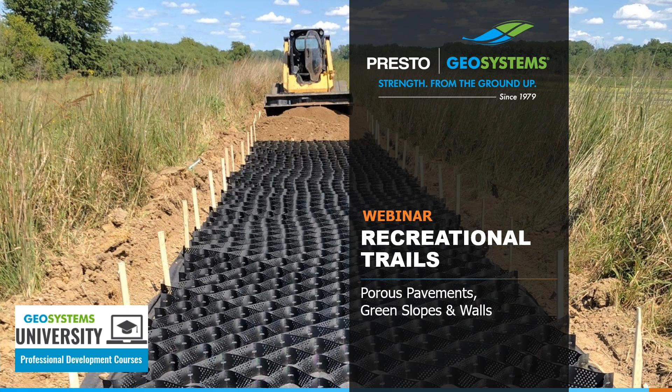The focus of this presentation is on ways to build recreational trails for walking, horse riding, and light vehicle use, as well as different methods for stabilizing embankments near trails.

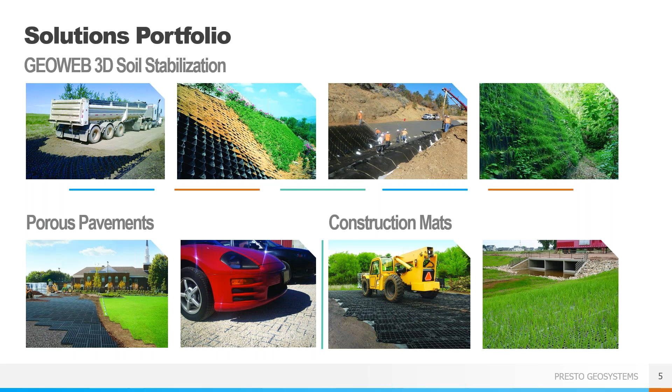We also have a line of porous pavements, both vegetated and aggregate infill versions, and some lightweight reusable construction mats. Today we will cover some GeoWeb solutions as well as our aggregate porous pavement product and a few of our construction mats.

An important thing to keep in mind as we go through this webinar: the trails made with our products are all considered permeable trails. That is, there's no impermeable paved surface being placed. The final surface is going to be stone or sand material.

This lessens the environmental impact of the trail, reduces the amount of heavy equipment required for installation, often in difficult to reach locations, and improves the overall cost and speed of the project.

We'll begin with what makes a good trail. The first aspect of the design is the reinforcement of the trail area, especially when the trail moves through sensitive areas. Keeping the path intact is how you keep people away from damaging vegetation or getting lost while wandering.

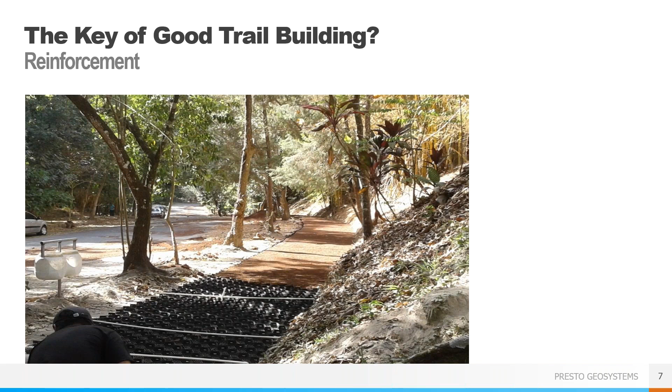The trail needs to be clearly delineated and needs to be reinforced enough to stay in place over time. Using products specifically designed to act as the reinforcement of the soil or stone means the trail will last longer and will not encroach on the surrounding environment.

The next key to a well-designed trail is drainage. Ponding water can ruin a trail surface, and water that runs off the trail into unreinforced areas can scour and damage those areas. As I mentioned, all the products from Presto are considered permeable, and it is precisely for this reason.

By keeping the surface permeable, the water infiltrates at the point of contact right where it hits the trail. The water can then permeate down through the product and into the subgrade, entering the groundwater system. The water won't pond at the surface and it won't run off or collect outside the reinforced areas.

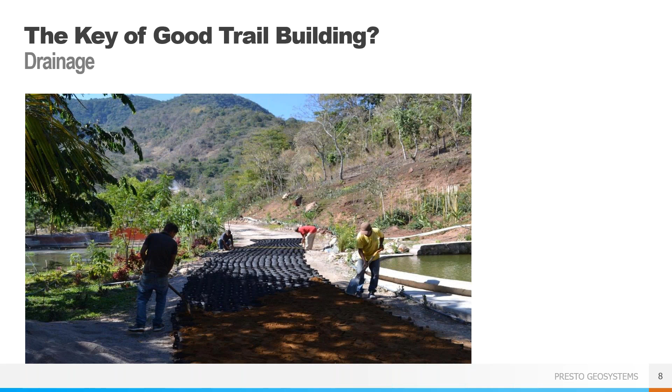This keeps the trail in the same condition no matter the weather, so there won't be any flaws or failures created below the surface that you can't see.

The last thing to consider when designing a trail is how to confine the surface. Loose aggregate, stone, or sand is easily moved under shoes, hooves, tires, and water, leading to ruts, holes, and generally damaged trail areas. When the trail surface is damaged, people want to move around the damage, leading them off the trail into unprotected areas, potentially disturbing sensitive environments.

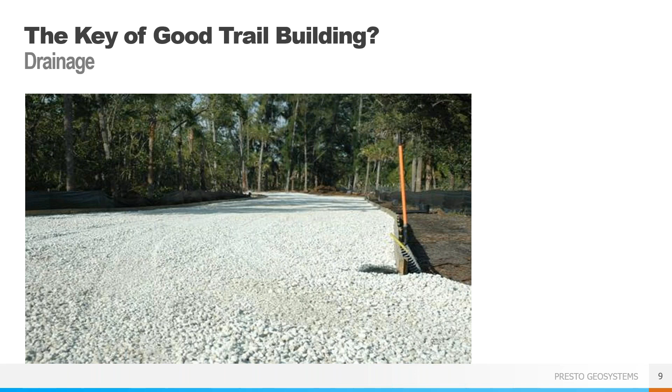Keeping the surface in place is an important feature of the products from Presto. When the stone or sand is properly held in place, ruts cannot form and the material can't be washed away. This greatly reduces the amount of maintenance required because the trail's surfaces aren't degrading.

Onto the products now. The first one we'll look at is the GeoWeb 3-dimensional soil confinement system. This is a GeoCell, which may be a term you've heard before. It's similar to a GeoGrid, but is 3-dimensional, so it has depth to provide true confinement and can be used in a wider variety of applications.

The GeoWeb system consists of two main components: cell size and cell depth. The cells come in three sizes, approximately 8 by 10 inch openings, 11 by 12 inch, and 18 by 20 inch. The heights are 3, 4, 6, 8, and 12 inches. The combination of cell size and depth depends on the project details and loading requirements, but generally trails will use a 4 or 6 inch depth and a small or medium-sized cell.

The seam strength is very important to the function of a GeoCell. The stronger the seam strength, the better designed the GeoCell is. A strong seam allows for heavier infill material, steeper and taller slopes, and better lifetime performance. The strength of the panel material, in our case high-density polyethylene, is also critical to the strength and performance of a GeoCell system.

Here you can see a typical GeoWeb panel. It comes tri-folded and palletized. Each section has a nominal width of 8.5 feet with lengths varying from 12 to 58 feet. The panels are flexible, opening like an accordion, so they can follow the natural contours of the work site without being confined to a rigid set of dimensions.

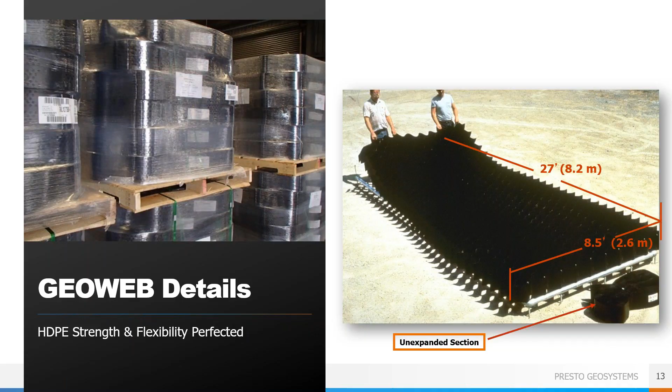Just a general note when reviewing product spec sheets for GeoCells and any geosynthetic product for that matter: pay close attention to any disclaimer language a product provider tries to sneak into the fine print. Recently, we've noticed a concerning trend where low-end product providers present performance data that appears to equal industry accepted standards on the surface, but then add disclaimer language in the fine print stating that their specifications are subject to change without notice, or that the information shown is for general purposes and not intended for design. So keep an eye out for that, especially if you get a request from a contractor on one of your projects to evaluate a substitute product.

Our spec sheet contains no disclaimers, and we stand behind our numbers so you can deliver certainty in the solution as you build with materials you can trust.

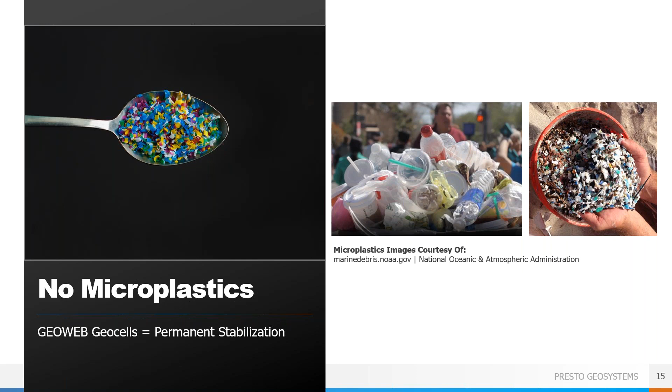The GeoWeb is made from high stability inert materials, so the GeoWeb GeoCells are your permanent stabilization solution and will not degrade, leach, or release microplastics into the environment. GeoWeb is manufactured with premium high-density polyethylene resin with no fillers, polymer alloys, or other items. Our base resin is the same material used in environmental applications such as geomembranes and other environmental barriers to protect against the spread of harmful toxins.

Our products have been third-party tested by accredited geosynthetics laboratories, confirming long-term stability against environmental factors such as weathering and oxidation. GeoWeb is lab tested to be durable for a minimum of 100 years in natural soil based on analysis in accordance with ISO 13438, and when subjected to UV radiation and accelerated weathering conditions in accordance with EN 12224. GeoWeb specimens retain 100% of their original tensile strength with no loss in mass or change in visual appearance.

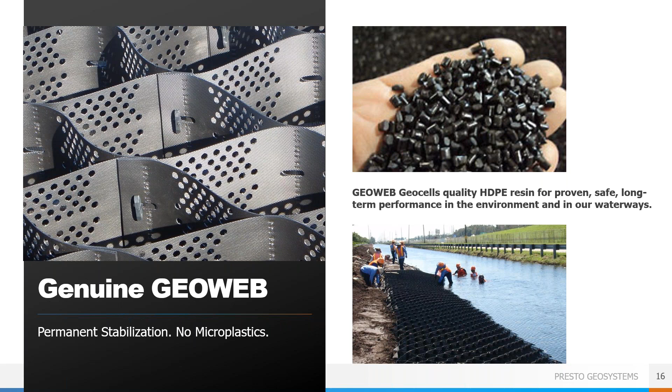And as mentioned, made in Wisconsin. So if you have any projects that require made in the USA certification, we can certainly provide that for you.

The GeoWeb system is a three-dimensional cellular confinement system, meaning that the GeoWeb panels have individual cells that are filled with an infill material that ultimately makes the final surface of the trail. By confining the infill material, the system distributes the loads and prevents rutting, and the cells keep the infill in place so that it doesn't wash away from stormwater runoff or move with traffic.

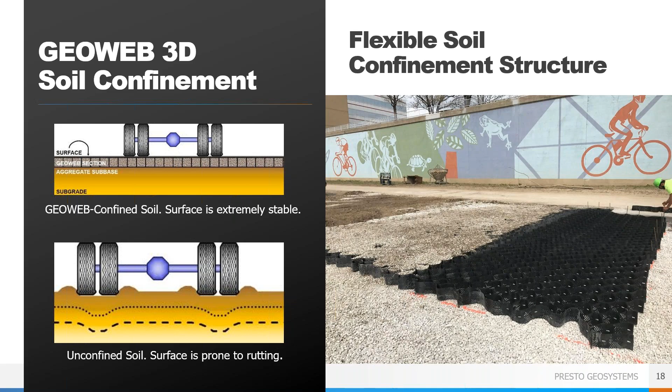The surface of the trail is going to be stable no matter what infill is chosen and require very minimal maintenance for the lifetime of the project. Let's look at some different options for building stable trails with the GeoWeb system. Walk, run, and cycle trails are meant for people, small animals such as dogs and bicycles only. This type of trail is typically not meant for equestrian use.

These are the most common types of trails and can go along shorelines, through urban areas, or through forests or parks. The flexibility of the GeoWeb panels allows for smooth, natural-looking curves. The panels can be held open with stakes, as shown here, but those stakes are generally not permanent. They can be removed once the panels are fully filled.

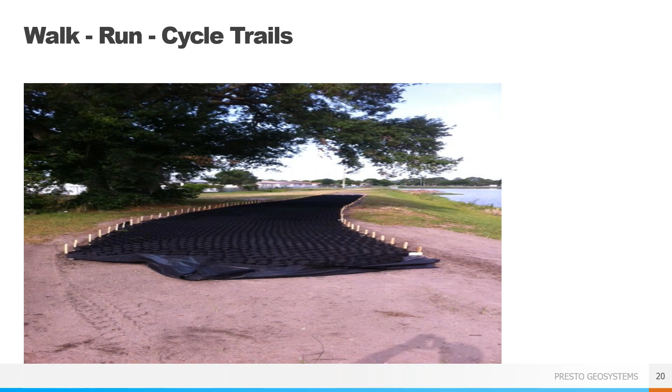The panels can be laid either along the length or width of the trail, and they are easily field cut with a saw or landscape shears and are securely attached together. No matter the dimensions, there will be little waste as panels can be placed together in nearly any configuration.

This is the finished trail surface using a local granite aggregate and allowing vegetation on both sides. The trail is clearly delineated and meets up with existing paved trails in the distance. The GeoWeb panels will keep the trail in place and level, minimizing surface erosion and potential runoff of contaminants into the adjacent waterway.

This path used granite, but any type of stone is going to be acceptable as an infill material, with the only limitations being that it should be angular and have a maximum particle size of about 1/3 the cell depth. So you can use what is local to your area without needing to import expensive engineered aggregate.

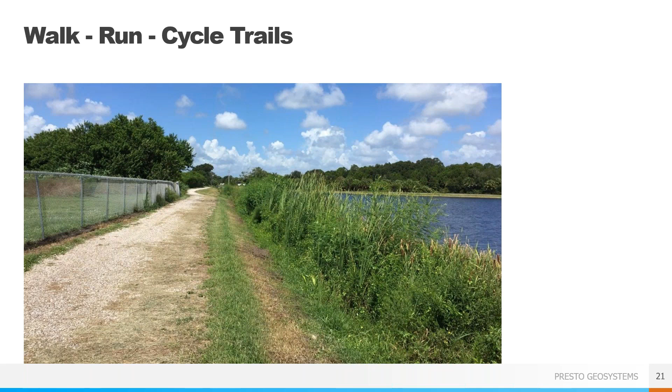As I said, it's easy to field cut the GeoWeb panels to accommodate the trail dimensions, even rather narrow trails like this one between a road and protected wetland. By having the GeoWeb panels create the trail, water runoff from the road won't wash dirt into the wetlands because the water will be able to infiltrate through the permeable GeoWeb surface, keeping the dirt surface in place for a nice jogging path.

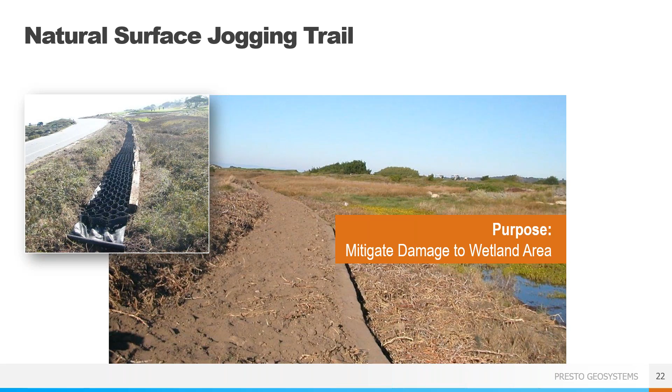Paths through neighborhoods or urban areas can augment or replace traditional sidewalks in places where drainage is a concern. Replacing broken and ugly concrete sidewalks with gravel surface paths allows for flexibility in design and aesthetic and will improve the safety of the walkway for pedestrians. These types of trails are good for any typical sidewalk traffic, but can also be designed to support cars or trucks.

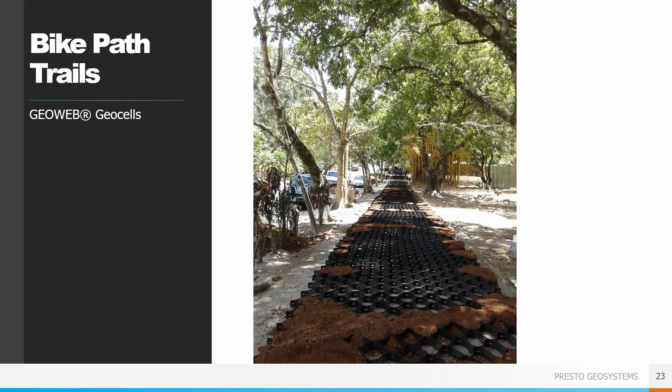A 3 or 4 man crew can install about 1,500 square feet of GeoWeb panels per hour, including laying a geotextile fabric and infilling the panels. The geotextile helps create a separation layer between the natural subgrade and the infill material, especially important in areas of very soft subgrade such as a wet clay.

We recommend overfilling the GeoWeb panels slightly when installing so that there is a wear surface over the panels and the plastic is not visible. This surface will become naturally compacted over time based on the trail usage. Having the panels slightly overfilled helps protect the GeoWeb material from vehicle tires or other potential damage.

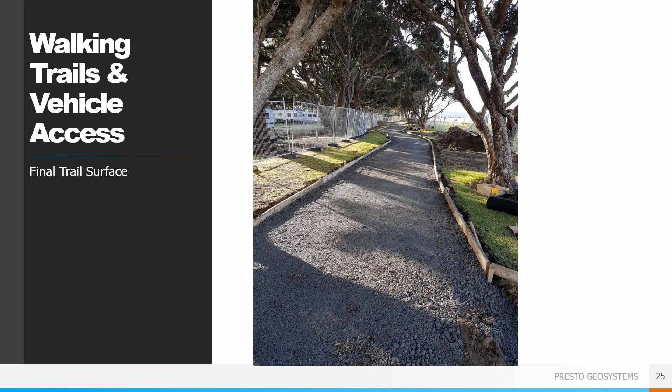Equestrian trails are next, and they have some different requirements than walking paths. These trails have to be hardy enough to stand up to horseshoes while remaining smooth enough to avoid damaging their hooves. Horseshoes can pick up a surprising amount of dirt with each step, and with their heavy concentrated point loading can cause quick deterioration of the trail. If the trail is designed to withstand horse traffic, it is more than sufficient to handle hiking, biking, and small motorized vehicles.

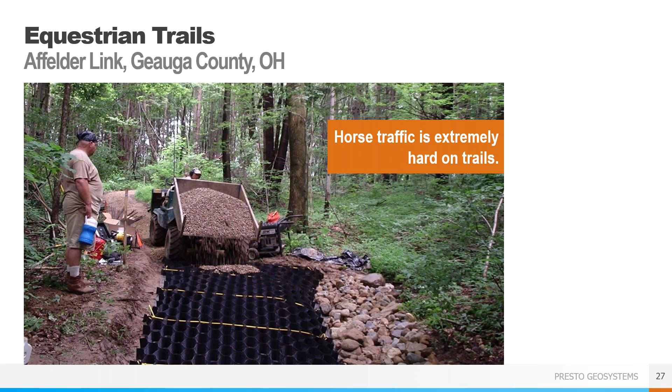The GeoWeb trail system was utilized for erosion control for these equestrian trails. The gravel surface is resistant to rutting, and the 1-inch stone size is easy for the horses to walk over. This aggregate path will not get muddy or create potholes, so the surface will remain ready for use even after rain or other heavy use.

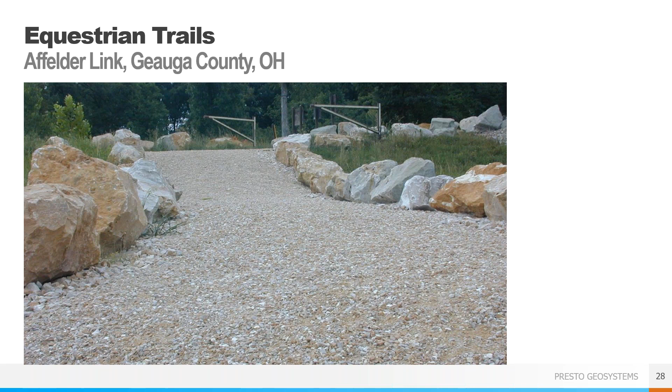Having a well-defined path also helps prevent damage to areas off the trail, and using the GeoWeb system allows for inclusion of natural markers, such as the large boulders we see here, on both sides of the system. Now we're going to walk through a case study for a shoreline trail in the city of The Colony, Texas.

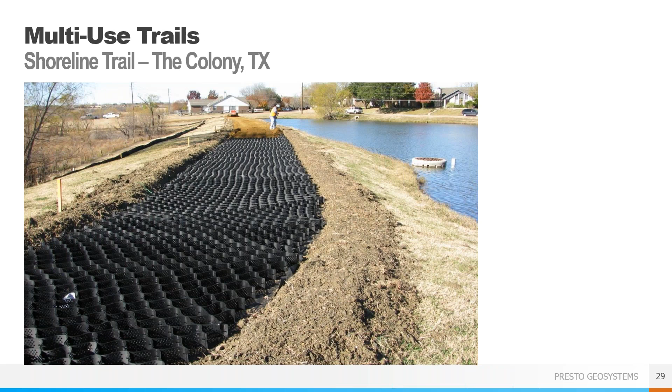This project was a multi-use trail along the shoreline of a lake. The trail will see pedestrians, bikes, small vehicles, and potentially equestrian traffic. The client, the city of The Colony, wanted to follow the natural contours of the shoreline, which the flexible GeoWeb panels can easily handle.

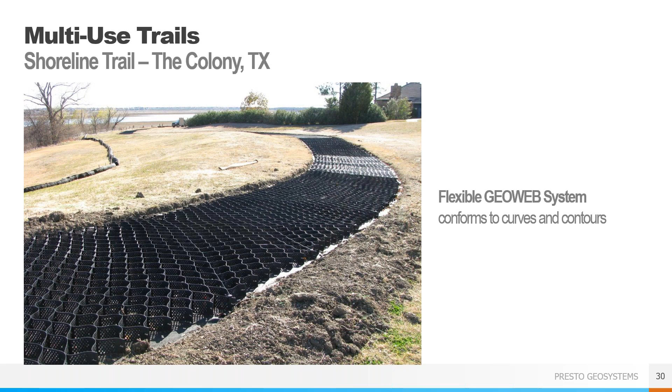There was concern about the potential for uplift under the system due to the very high water table and lake level fluctuations, so additional steps were taken to prevent this from occurring. A series of polyester tendons were run through the GeoWeb panels and were anchored multiple times per panel. The tendons, in conjunction with the final infill stone material, prevent the GeoWeb system from lifting and deforming due to groundwater pressures. This is good practice in wet environments with potentially saturated soils.

A well-graded decomposed granite was chosen as the infill material as it was readily available in the area. Using local materials is encouraged, though any type of stone is acceptable, again, as long as it is angular and allows good drainage. This means that you are going to want stone with limited fines so the water can percolate through. If the water can't infiltrate, you will get ponding at the surface, similar to a paved surface such as asphalt. So you want to make sure your infill material avoids this problem.

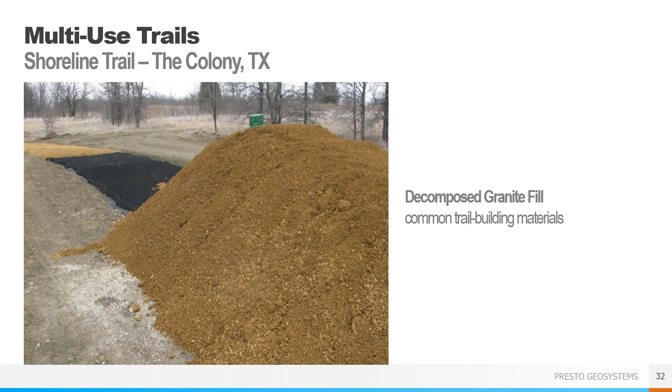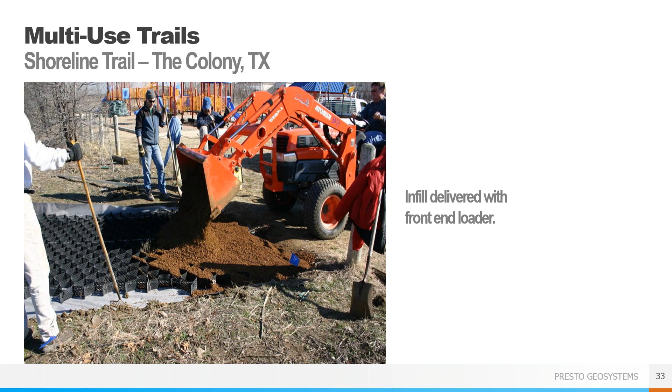And you should keep in mind that this material is going to be your final surface, so aesthetics may be a factor in choosing the material. Once the GeoWeb panels were installed, the infill was placed with a standard front end loader and then raked by hand to ensure all the cells were fully filled. The material should be placed on the outside of the panels as needed to match the final grade and meet up with the unexcavated areas.

For ease of construction, you can drive your vehicles and equipment on the GeoWeb panels as soon as they are filled, right up to the limits of the filled area if necessary, so you don't have to wait for the entire system to be filled before using it. This can help minimize the impact of construction on the area, since you won't need to create access lanes or clear out excess vegetation on the sides.

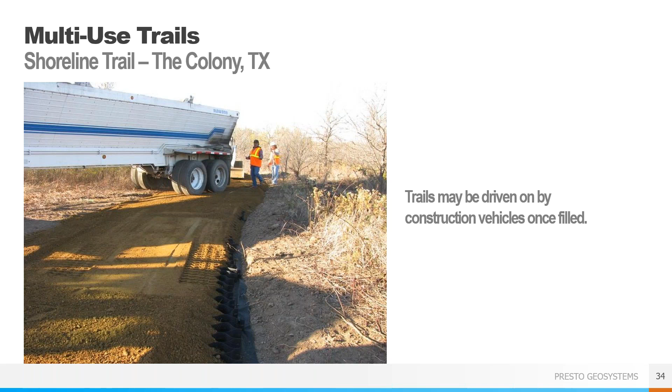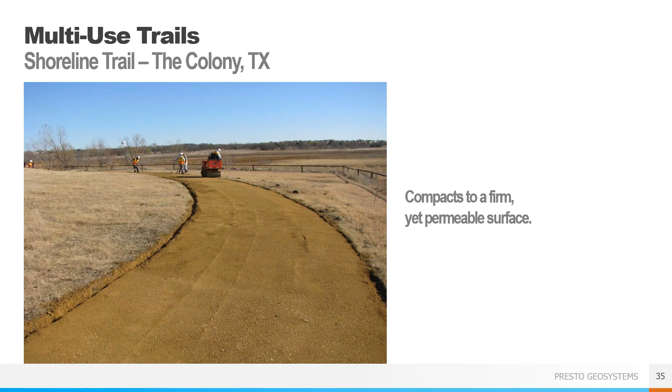A small smooth barreled roller compactor finishes off the job. This is where having the wearing surface of overfilled material mentioned earlier comes into play. The compactor isn't driving directly on the GeoWeb panels, and you can easily visually confirm that no cell is underfilled. Again, the stone infill should have minimal fines. Less than 10% is ideal. Avoiding fines in your stone allows the system to stay permeable and not get clogged.

Trails built with the GeoWeb system are a great example of green infrastructure by not disrupting the water cycle or impacting the groundwater flow. No additional stormwater infrastructure is needed when the trail surface is permeable, so there is minimal impact on the environment around the trail. Here we can see the nice clean trail created using GeoWeb, allowing for most uses without having to worry about needing constant maintenance. The path is clearly delineated while maintaining a natural look that people won't mind seeing in their backyards.

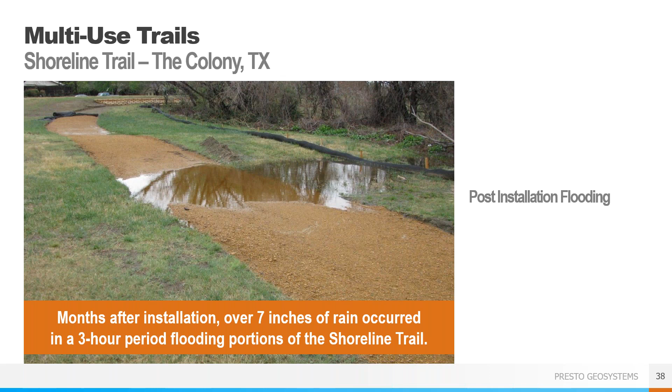A few months after installation, there was a massive rainfall event, over 7 inches of rain in a 3-hour period, which can be incredibly damaging both during and after the storm. Several portions of the trail were flooded to the point of standing water at the surface on and around the GeoWeb protected areas. But thanks to the GeoWeb system and the extra precautions such as the tendon system, the trail was not washed away as you might expect from an unprotected gravel trail. The trail was still usable, allowing maintenance workers access to the damaged areas for inspection and repair. No repair was needed to the GeoWeb system, and once the water was able to infiltrate, the trail was as good as new.

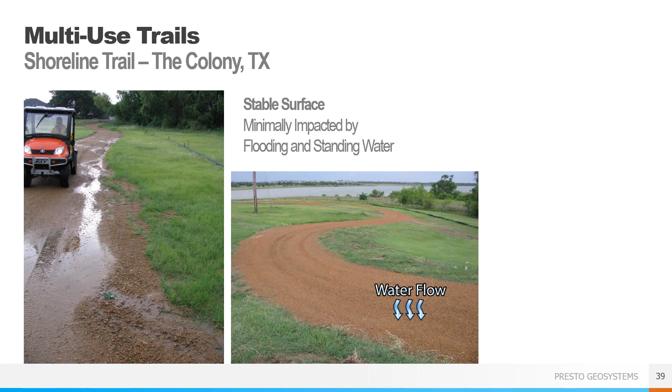When there is such a large rainfall event, the ground becomes saturated and doesn't allow water to infiltrate, giving it no choice but to stay at the surface and become sheet runoff. The GeoWeb system protects the trail surface against erosion when this happens, with the cell walls functioning as a series of check dams, keeping the infill confined within the individual cells. Then, when it is able, the water can infiltrate into the ground and the trail is still in good shape.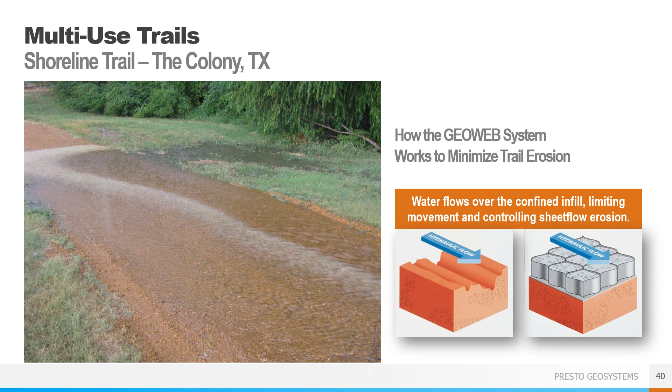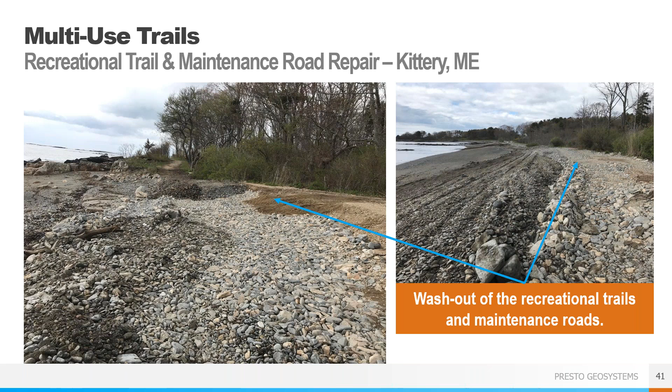To reconstruct the washed out recreational trail and maintenance road, 6-inch deep GeoWeb panels were installed at the site and infilled with 1-inch crushed aggregate. There were sections of the trail that sloped down to the beach areas, so to stabilize the 2-to-1 sloped areas down to the beaches, 4-inch depth GeoWeb sections were secured to the face of the slope with a deadman, tendons, and Atra tendon clips. Then the GeoWeb was filled with aggregate and covered with large riprap.

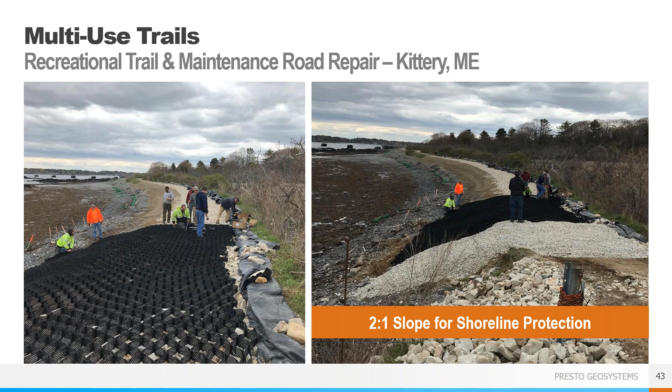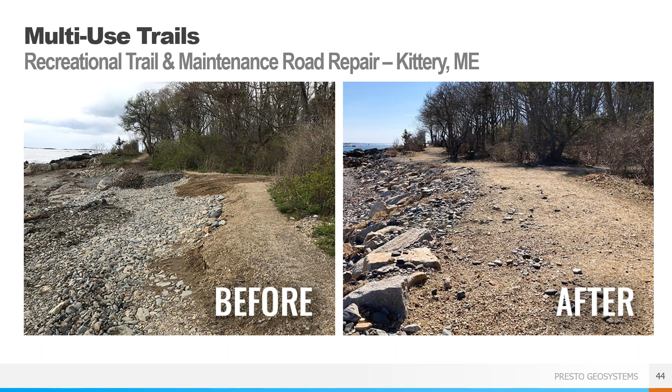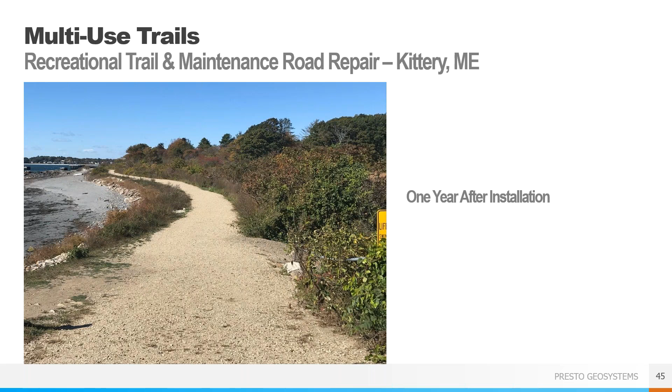By using the GeoWeb system, the park was able to armor the maintenance road, recreational trail, and slopes from future storm events. Here's a before and after photo of one of the trails. Since its original installation in 2018, the GeoWeb load support and shoreline protection system continues to perform as designed, allowing the community to once again enjoy the trail system and local beaches.

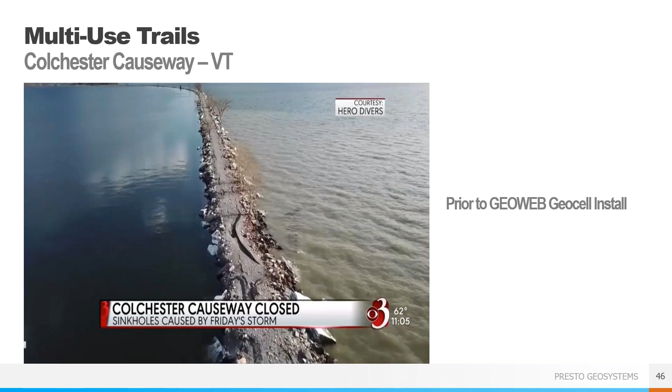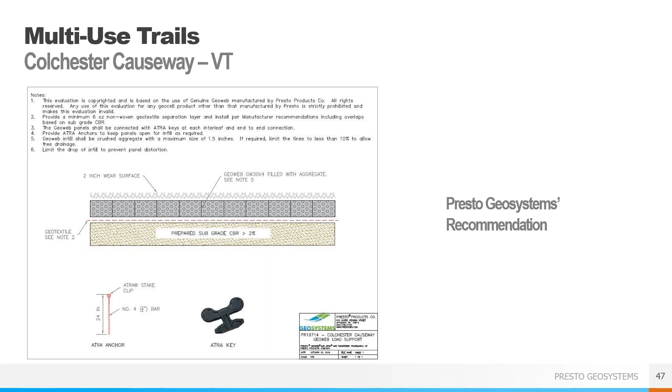This project in Vermont, we had an existing causeway which was used as a walking and biking trail across Lake Champlain, and it was blown out due to storms and had to be closed. The local distributor worked with the town and submitted a request for project evaluation through our website. And here you can see our recommendation of the mid-sized cell 4 inches deep. Installation took place in November of 2019, and the trail is holding up well after several significant storm events.

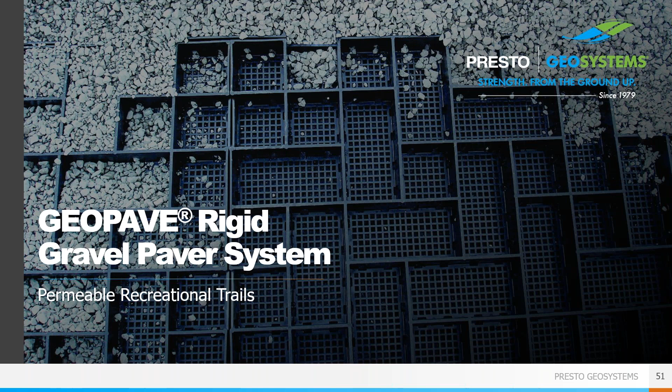Now, moving away from the GeoWeb system, the next option illustrates similar confinement of infill, but within a rigid paver structure known as GeoPave. Unlike the GeoWeb material, which is typically 4 or 6 inches deep for trails, the GeoPave units are 2 inches deep and made from recycled high-density polyethylene. The GeoPave units have these rigid paver characteristics with specific features needed for performance with aggregate infill. The main one I want to highlight, though, is the monolithic mesh bottom.

This is a molded in place mesh on the underside of the paver unit. This mesh keeps the stone infill from migrating under the unit, and the integrated nature assists in the overall rigidity of the paver unit. The lattice bottom spreads the load similar to a snowshoe, so the wheel loads do not create ruts. GeoPave units are locked together with a connection device to create a fully integrated, contiguous pavement that is highly resistant to traffic stresses.

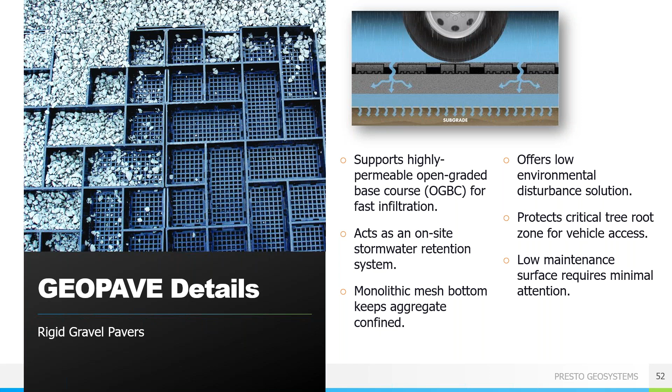GeoPave was designed using a finite element analysis and will not lift up over time, as can be seen with other systems. And as I mentioned, the GeoPave unit is only 2 inches deep, which can be a real asset if the project requires a thin cross section due to buried utilities or high excavation costs.

We'll now look at a few project examples. This project is an access trail for walking down to a swimming area on a lake. The walkway had to be ADA compliant so that everyone could use it. It was also important that the trail help reduce runoff into the lake, so the permeable nature of the GeoPave system was critical.

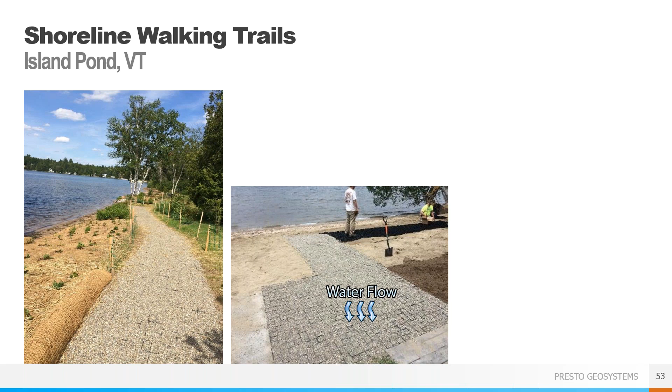You can see the eroded trail before stabilization, both the trail surface and the surrounding areas, and the new trail area on the right stabilized with GeoPave. The protected system will help prevent erosion from stormwater runoff and be a smoother surface for visitors walking on it.

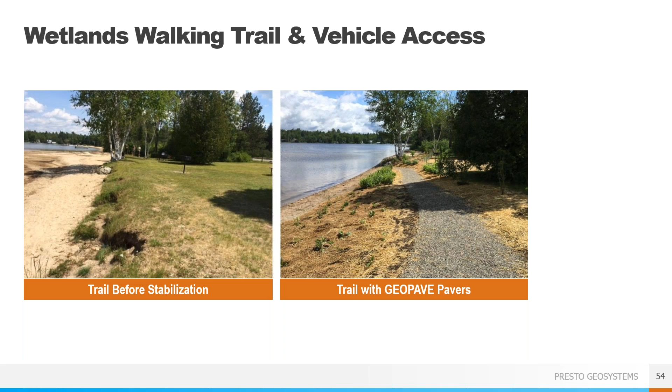Here's another trail in a wetlands area. In this case, the GeoPave units were placed directly on the subgrade, but a geotextile separator fabric and a base layer of aggregate underneath the panels can be incorporated to support heavier loads or add additional detention. No matter the section, the entire system creates a flat, stable surface and supports the anticipated loads.

The same principles discussed with the GeoWeb system apply here as well. By using an open graded aggregate stone with minimal fines content, water can infiltrate at the point of contact, reducing surface runoff, and the individual cells confine the aggregate, preventing rutting and washout of the stone for a stable walking surface.

A major concern here was protecting sensitive tree roots from impact damage. The GeoPave units are a great way to provide tree root protection by creating a bridge over the roots, so there's no direct contact from vehicle or pedestrian loads that could harm the trees. This bridge lasts the lifetime of the GeoPave trail and allows the trees to grow unimpeded.

One of the great things about building trails with the GeoWeb or GeoPave system is the amount of choice you have over the final look of the system. Two rock colors were chosen at this site to delineate the parking from the walkways. A light colored crushed limestone was used for the parking areas, and a contrasting reddish brown buckshot crushed aggregate for the walkways. Additional delineation such as concrete parking stops or snap delineators can be included to help create a sense of separation within the overall GeoPave system.

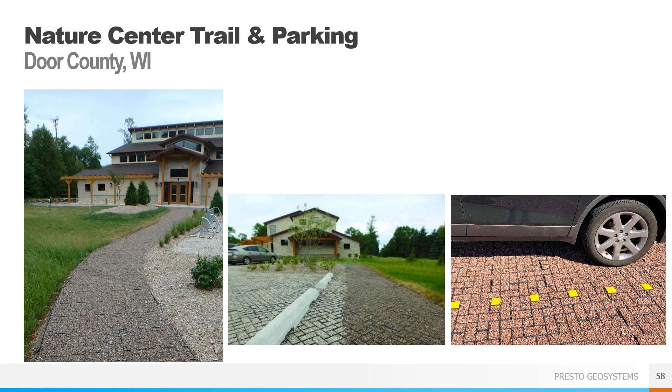This project ultimately earned LEED Gold for all of the low impact structure and landscape elements. Protecting the local watershed was the primary reason for the inclusion of permeable parking and walkways utilizing the GeoPave system. These pavements also perform as natural on-site stormwater detention, storing water in the base for natural percolation without the need for a large isolated detention pond, which would have been an unattractive nuisance on site.

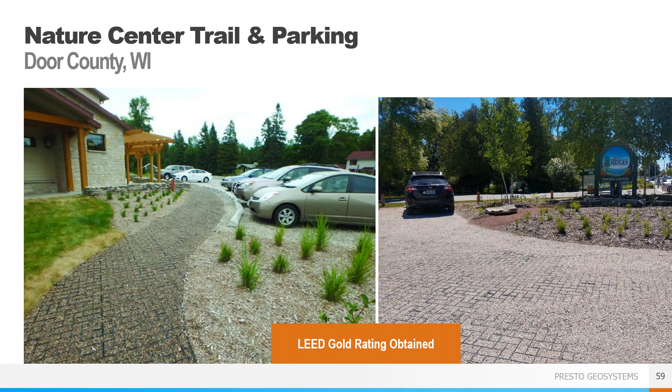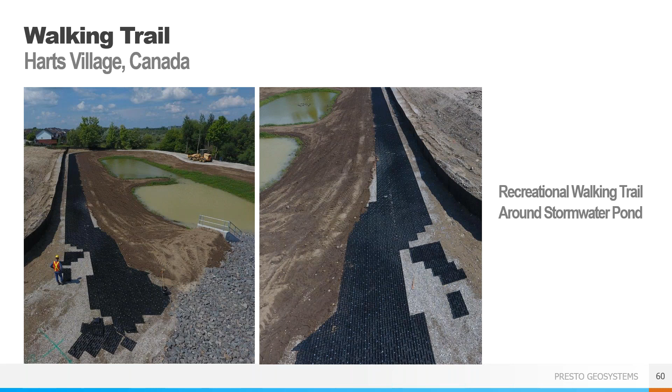The GeoPave units come in 20 by 40 inch panels covering about 5.4 square feet, but they can easily be field cut or staggered to accommodate curves, so you are not locked into a linear path.

The system was a great choice for this project with a quick and easy installation, the ability to allow water to flow through the system and not run off into the pond, and providing a smooth, clean surface for walking.

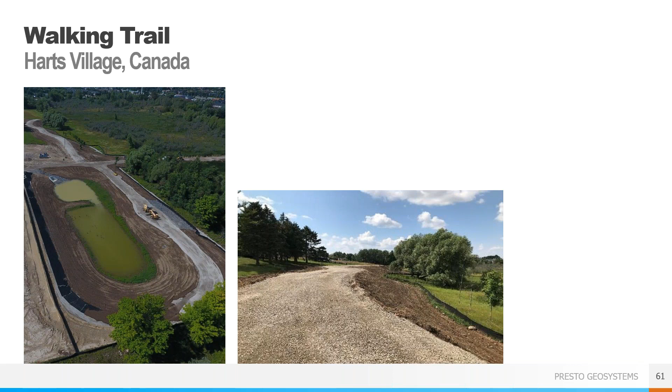The standard GeoPave units are black, but a tan GeoPave is an option that allows natural blending with light colored stone. Again, the options available for the final design of the trail are what make using this system so versatile and a great choice for any project.

The last option for trail surfaces is the GeoTerra system, which are construction mats that are strong yet lightweight and don't require any fill. Because no fill is required, they are perfect for areas where infill resources are scarce.

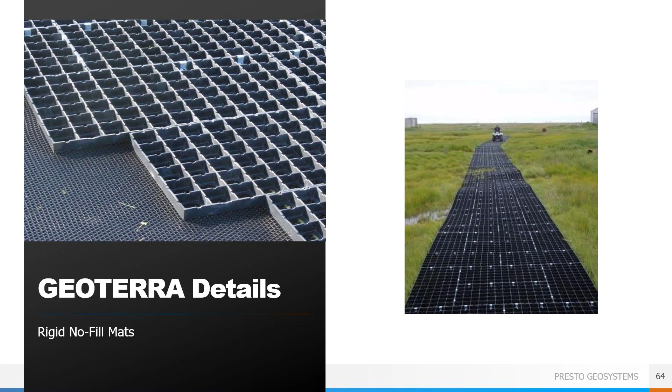Because there's no fill material, GeoTerra trails won't kill the existing vegetation they are placed over. They are open on the top and bottom and allow for vegetation to grow through them for as long as they are in place, which is essential for minimizing environmental impacts for pathways.

GeoTerra units cover approximately 5 square feet each and can be connected to cover a larger area as needed. The mats are strong enough to support heavy vehicle and construction traffic loads and have enough flexural strength to bridge soft soils without warping or cracking.

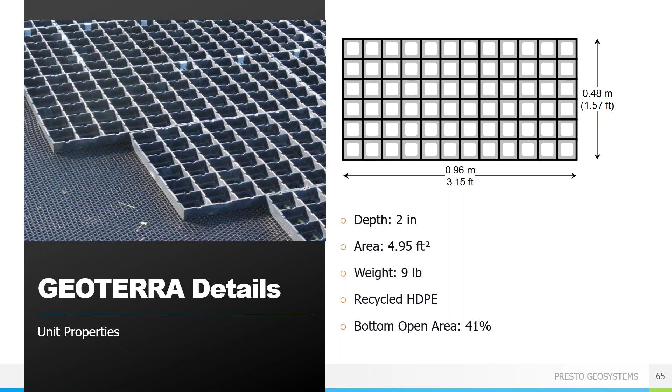The GeoTerra units are connected with strong metal connectors to essentially form a floating road through wetlands with very soft soils. The connected mat system distributes loading across the pavement, minimizing potential for rutting or sinking in soft, muddy soils.

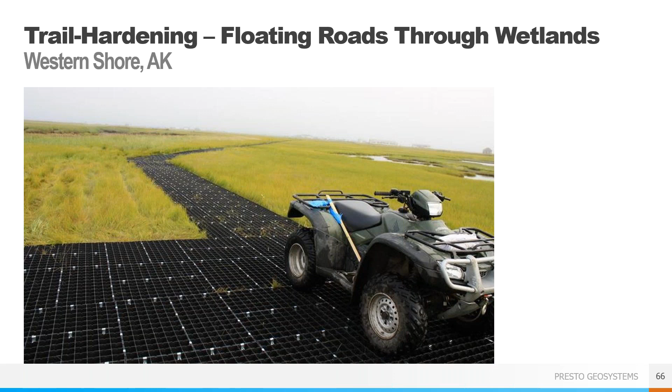In some areas of Alaska, hundreds of miles of ATV trails cut across wetlands and stream beds, causing extensive damage to natural preserves. ATV riders can cause the loss of vegetative cover and habitat values. GeoTerra mats offer a great solution for low impact access in these wet and environmentally sensitive areas.

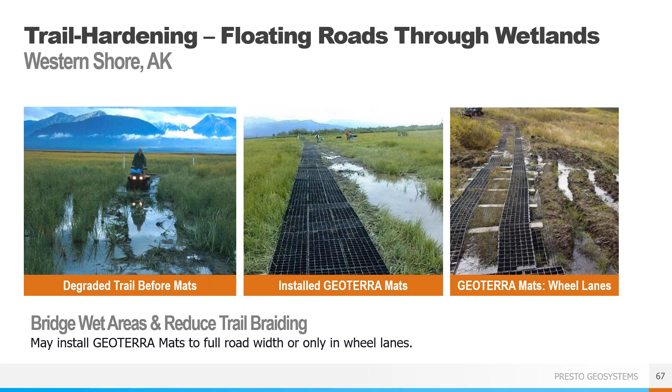The preferred method is to place the units across the entire trail width, but in some cases, just in the wheel paths is acceptable.

As planned, indigenous grasses regenerated through the permeable open-celled GeoTerra mats, ultimately semi-camouflaging the product with the natural environment and protecting the vegetation from damage. In this case, the system ultimately ended up as a permanent structure, and the GeoTerra mats will be able to last for as long as needed.

The last section is going to pivot from the flat surface of the trail to the embankments that may be alongside or near the trail. Green walls can help create the space for trails to run through and work with permeable trails to allow water flow and promote vegetation.

The same GeoWeb GeoCell technology that creates the trail surface can also be adapted to create retaining walls, such as this vegetated levee. The GeoWeb panels are stacked vertically on top of one another to create the wall, allowing for more horizontal space for the trail to be placed.

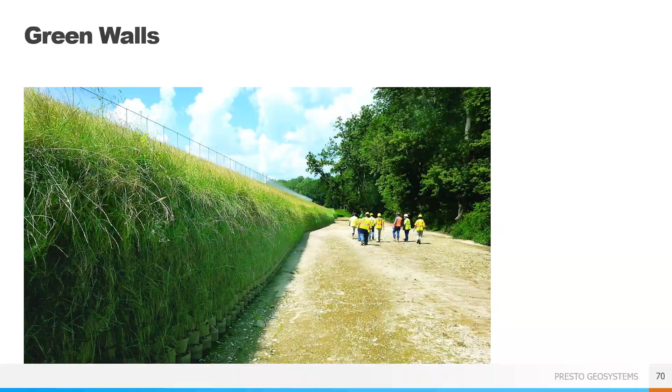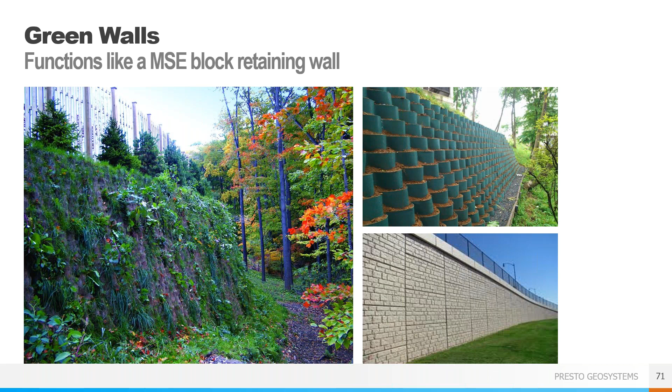The primary benefit of the GeoWeb wall is to create a stable, natural living structure with vegetation for aesthetic appeal. The open front fascia allows rainwater to infiltrate. The wall structure can also absorb some runoff from the top of the wall, such as from walking trails.

While vegetated walls are most common, aggregate-filled walls are also possible. Using the same open graded aggregate we have been talking about, water can infiltrate through the wall so there isn't runoff onto your road or trail. An aggregate wall may be useful when you don't want to worry about maintaining vegetation in an area, such as an emergency response space or in areas where vegetation is difficult to establish.

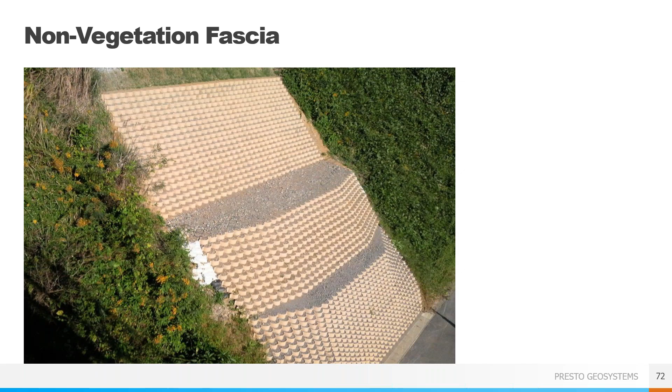Walls are designed as either gravity or reinforced walls in the same way as mechanically stabilized earth, or MSE, wall systems. An advantage they have over MSE block walls is flexibility in poor soil conditions. Their relatively lightweight and flexible nature allows them to tolerate reasonable differential settlement very well. Another advantage over traditional walls, such as gabion basket walls, is the relatively shallow embedment depth of the wall and the ability to create a very steep wall face, as steep as 80 degrees.

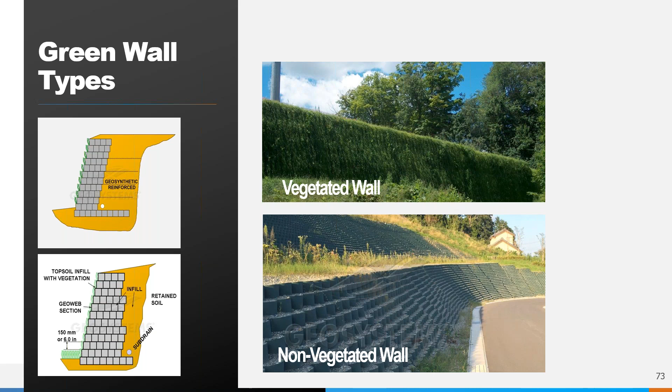It is always necessary to consider live and dead loads that the wall will experience, especially when placed near trails or roads. Dead loads would be things such as buildings or soil slopes above the wall, while live loads would be construction traffic and long-term vehicle traffic.

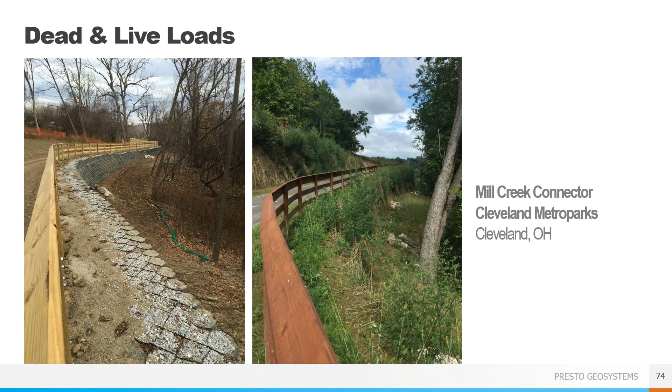We'll now look at a vegetated retaining wall case study.

This project was faced with having to retain soils in a very problematic soft soil area, but piling systems were expensive and they wanted to maintain the natural environment. Concrete and modular block walls were considered, but ultimately they chose the vegetated GeoCell wall for its natural aesthetics and lower cost.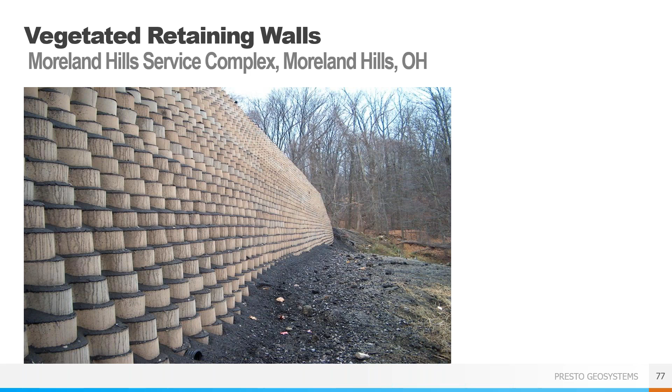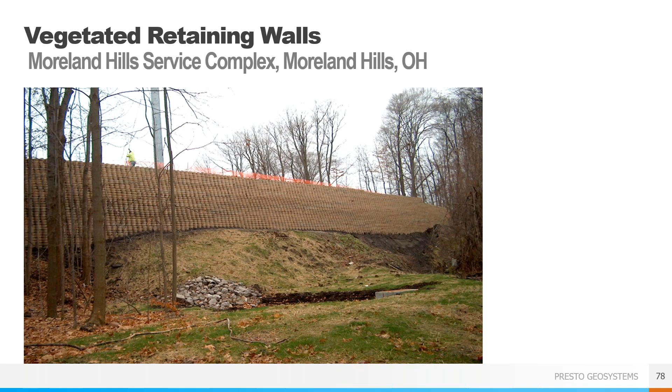As mentioned, the system's inherent ability to withstand some differential settlement in soft soil environments was extremely important at this site. The wall had varying heights along its length, which was easily accommodated by the GeoCell system. By using the GeoCell wall, they didn't have to bring in invasive equipment such as augers or H-piles, speeding the installation process.

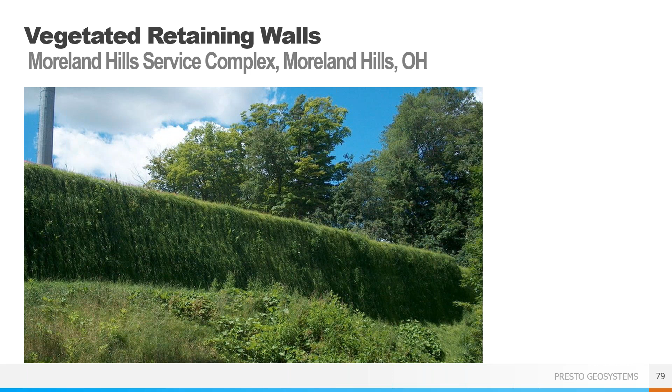Here's the completely vegetated wall. The horizontal terraces allow rainwater collection, helping to minimize runoff and erosion. Pretty much any type of grass or flowering vegetation will survive on these walls. So by using local vegetation, upkeep can be kept to a minimum.

Presto Geosystems offers a free software for designing GeoWeb retaining walls and slopes. It's available on our website, prestogeo.com, and can be used by engineers and designers to determine if the GeoWeb system is appropriate for your projects. There are a lot of resources on the website on how to use and interpret the software, but we're always happy to help with questions or recommendations.

So far, we have looked at trail surfaces, trail surface construction, and vegetated retaining walls. GeoWeb can also be used for erosion protection in a surficial manner. This is a good way to protect slopes against erosion when the slope is shallower than what would be required for a retaining wall and globally stable, around 60 degrees or shallower. If there are questions about this type of application, we are happy to talk you through it.

There are three main infill types for slopes depending on the type of protection needed: topsoil, aggregates and granular material, and concrete. We'll focus on topsoil and vegetation infill, as that is typically what is selected in trail applications to keep things looking as natural as possible.

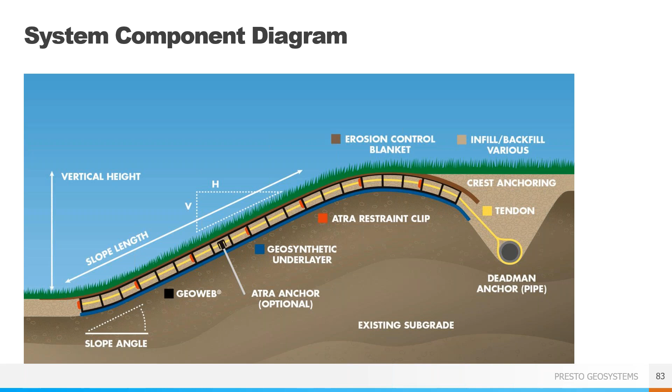The ATRA key is the first component for a completely integrated system, connecting each individual panel of GeoWeb into a single web that covers the slope. It allows for faster installation of the GeoWeb and will last the lifetime of the project, ensuring that the slope is protected and that the GeoWeb system will not fail under anticipated loads.

The specific engineering values of the ATRA key will ensure the system holds up to loading over time, without the corrosion seen in staples or the failure of underperforming cable tie systems.

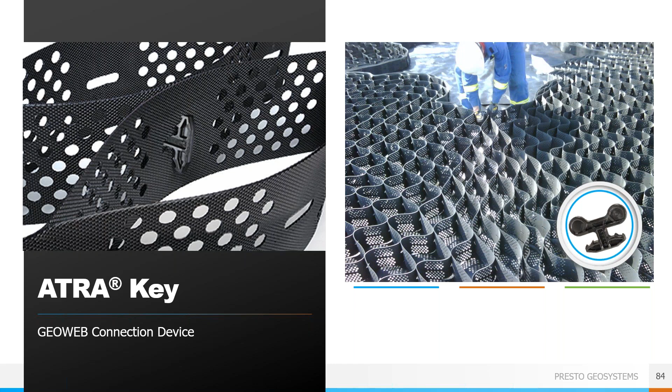As slope angles increase, the driving force of the infill material exceeds the available frictional resisting force, and additional anchorage is required. The ATRA anchors, which are our ATRA clips on top of number 4 rebar, hold the GeoWeb to the slope and penetrate into the ground. If corrosion resistance is required due to project conditions, we can provide a high-density polyethylene ATRA speed stake that is designed to work with the GeoWeb.

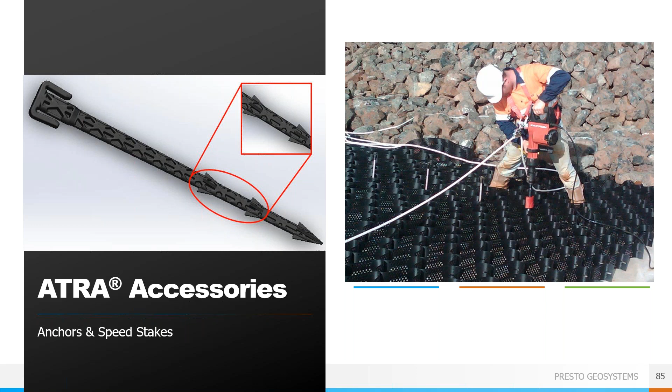For long, steep slopes where the native soil is highly erodible or over a surface that cannot be punctured, such as a geomembrane, tendons can be used. The ATRA tendon clips transfer the load from heavy infill material to the tendons and crest anchorage system. Only the ATRA tendon clip is specifically designed to fully transfer safely and securely the forces placed upon the geocell.

Every accessory and every feature has been designed and tested to specifically work together so that we go from problem to design to construction solution with a system where the modeling replicates the real-world forces.

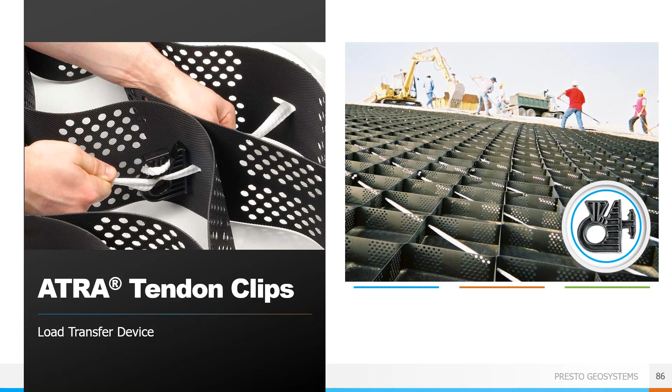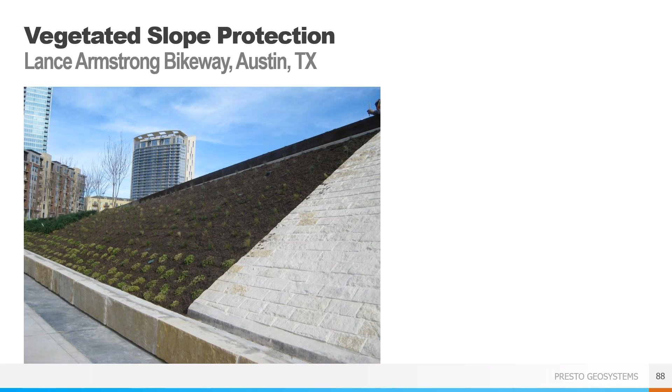In summary, Presto Geosystems offers GeoWeb, GeoPave, and GeoTerra that can meet any trail design needs, as well as GeoWeb for earth retention and slope protection near trails. Each product is designed to protect the surrounding environment while offering a low maintenance surface that won't wash away during heavy rain events. We offer a complete solution, including connections and anchoring options.

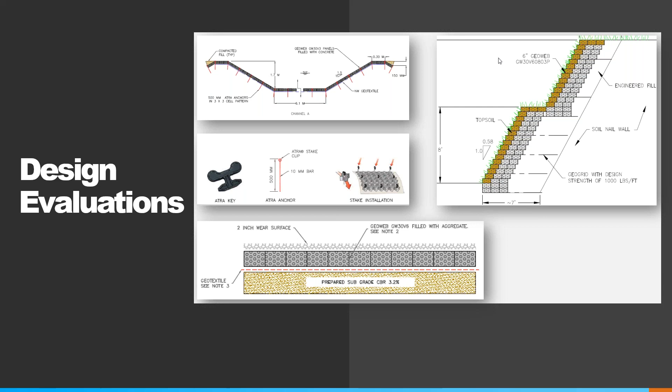Then within 3 business days, but usually faster, we provide a complete design evaluation, including infill recommendations and anchorage requirements. We will work with you to get you the best design for your project.